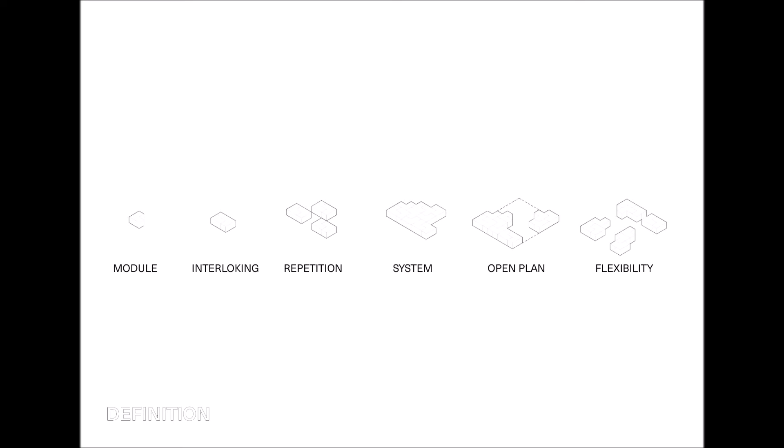Modular architecture can be understood as the design of any system composed of basic units called modules, interlocking between each other and repeating in an open plan, allowing flexibility for the design. The opposite would be integrated architecture, in which no clear division exists between components.

Modular Vernacular: the concept of repeating a module in an organized way can be found in vernacular and traditional architecture. One example are the shabonos in the Amazonian or the Japanese houses, where a series of modules are repeated in order to create either settlements or housing units.

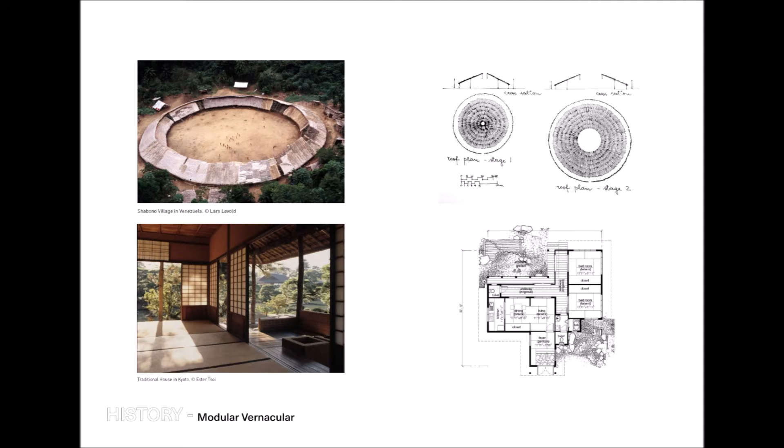Ancient civilizations also had their own approach to modular architecture, which can be found from Egyptian and Mesopotamian temples all the way to Greek or Roman temples. Modular logic can also be found in mosques and cathedrals, in all kinds of temples and housing throughout history in classical and modern times.

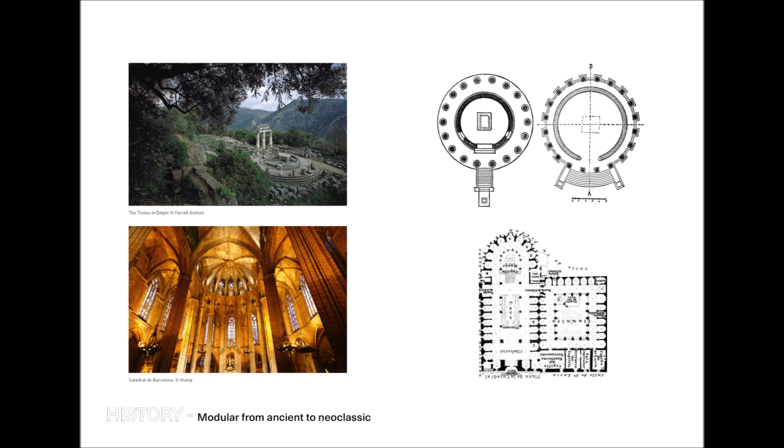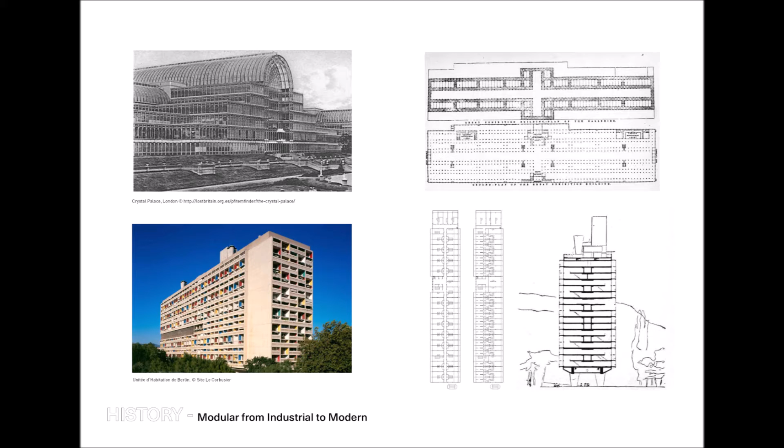With the Industrial Revolution and the popularization of steel structures, modular components were easily produced, transported, and mounted. Modern movements, such as the Metabolists in Japan and the Bauhaus in Europe, found solutions with prefabricated concrete modules, which maximized the production of housing as if it were an assembly line.

Parallel to this, came some movements of anti-industrialization. With the Arts and Crafts movement, there was an intention for architecture to head towards craftsmanship and art, freeing it from classical patterns and from the mass production of the industrial era. Later in the 20th century, the Deconstructivist movement searched for a break from the modularity and stiffness of previous architecture movements.

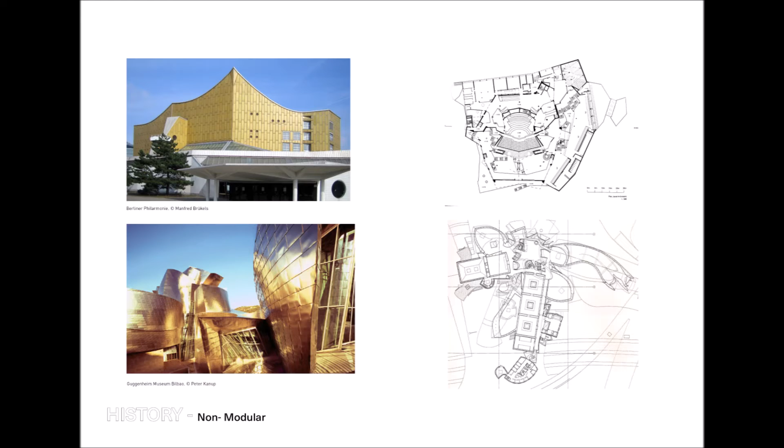Nowadays, modular architecture positions itself as one of the most sustainable solutions in building matters, as it involves a great deal of prior planning and preparation. Before construction, there is a significant cut on expenses and waste on the construction site. Nevertheless, the modernist tendency of reinforced concrete and some new slow-degrading materials is still dominant over other low-impact materials.

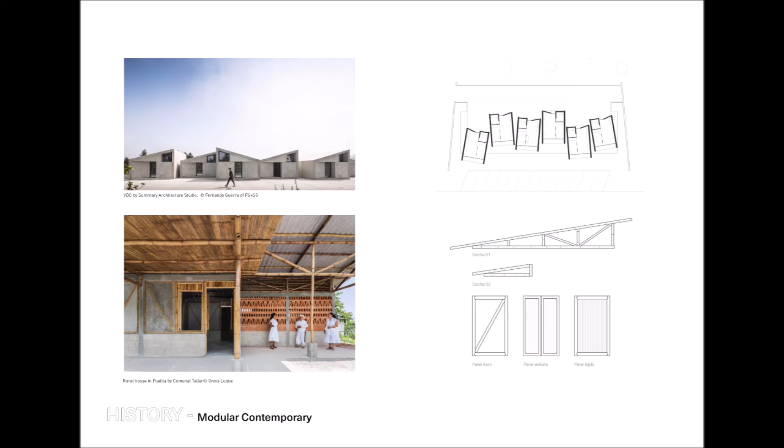What we consider as a module, according to Britannica: modular architecture is an arbitrary unit adopted to regulate the dimensions, proportions, or constructions of the parts of the building. This concept begins in antiquity by using the column as the main module of the construction design process.

The module in Vitruvius's theory appears as a crucial tool and method to achieve understanding of a proportional concept. In Japanese architecture, the rice carpet, called tatami, was the main module used to give proportions that determined room sizes.

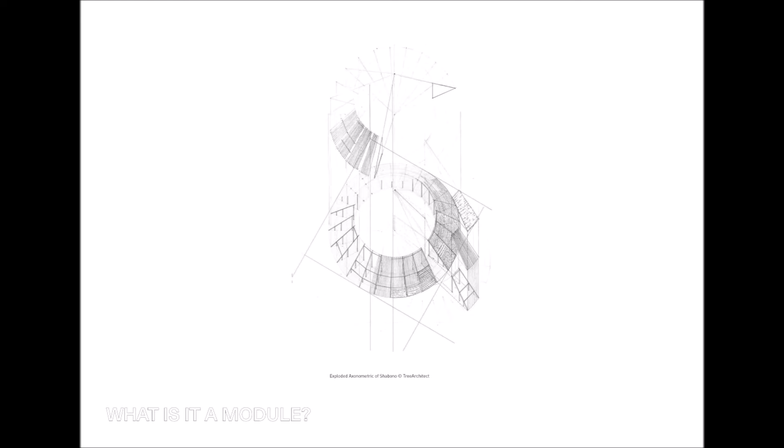Another example from vernacular architecture is the Shabono communal dwelling of the Yanomami tribes in Venezuela and Brazil. This circular construction is based on a module unit by which it is possible to create a general diameter of around 80 meters.

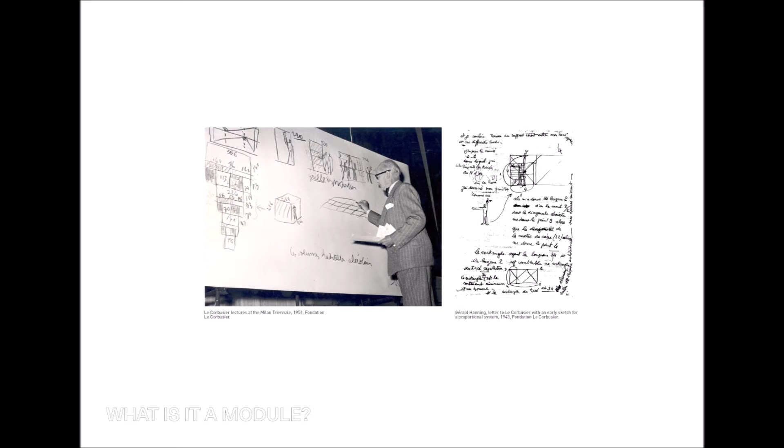In the modern movement, modules were used throughout the design process to organize the proportioning and dimensioning of the plans. Probably the most comprehensive system imagined in the 20th century was the Modulor of Le Corbusier. This proportional system was a product of an interdisciplinary collaboration with historians and mathematicians, referring to statistical measurements of the human body.

Module nowadays is mostly connected with prefabrication systems that serve to assemble the building on the construction site. Concrete, either precast or prestressed, is frequently used to produce modules that can be assembled in a variety of designs. Although modular design is deeply connected with architecture throughout history, the prefabrication modular system is an outcome of the industrial era.

Louis Kahn, with his architectural interest directed toward aesthetics and strong sensorial experiences in the built environment, approached modular and prefabrication design in a way to achieve a creative solution. He transferred the prefabrication model from the construction industry to a more tectonic and architectural context. A phrase used constantly by him that sums up his view was, 'What does a brick want to be?'

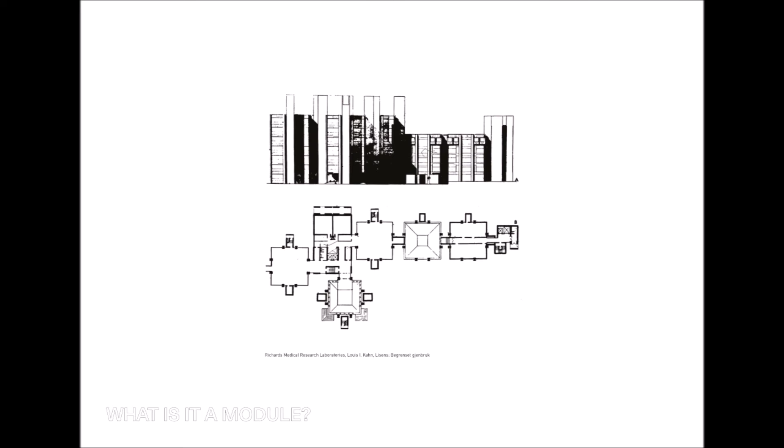Module, as we realize, is a vague term. As indicated by its architectural history, it can be expanded to a spatial generator or reveal a platform that various disciplines can interact with. It can achieve a flexible outcome, liberated from standardized approaches.

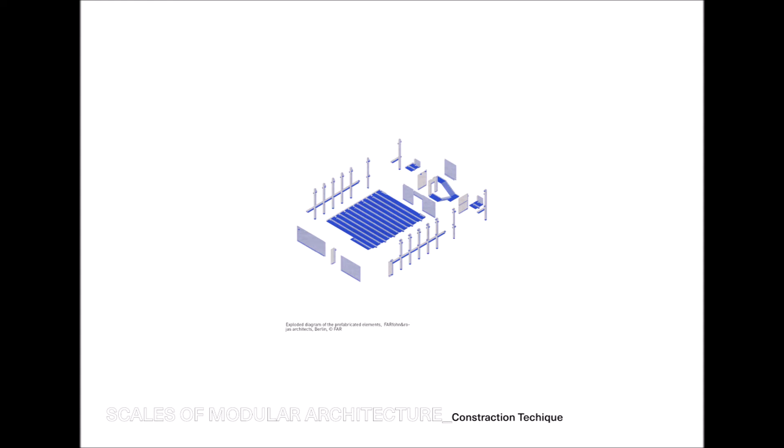Thinking in a context of limited resources, the module can incorporate vernacular architecture and social parameters in a constructive way. Taking this into consideration, we have noticed three different categories, three different scales of modular architecture. To begin with, an interesting dimension of modular architecture is the ability to form an independent construction system with various different alternations. Mostly industrial examples deal with this aspect, but important vernacular translations appear often as well.

The project Wohnregal by FAR Architects is an example of how precast concrete elements, common in industrial warehouse-style buildings, can bridge important challenges with high architectural value.

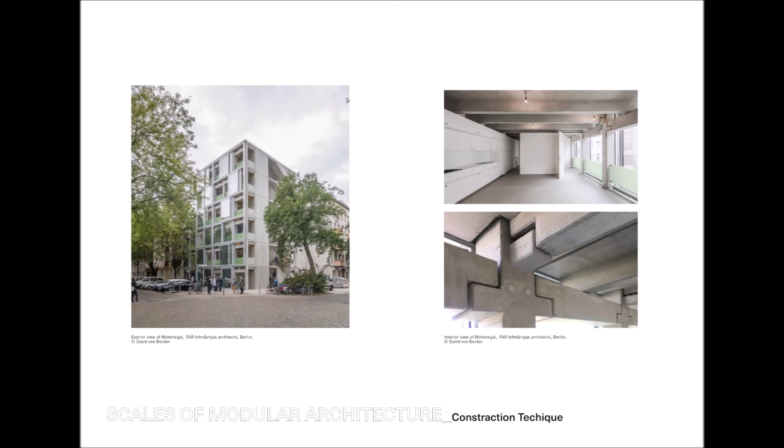They use the prefabricated system with long-spanning TT beams that can support a precast ceiling without the need of interior structural elements, achieving a flexible interior configuration and low construction cost.

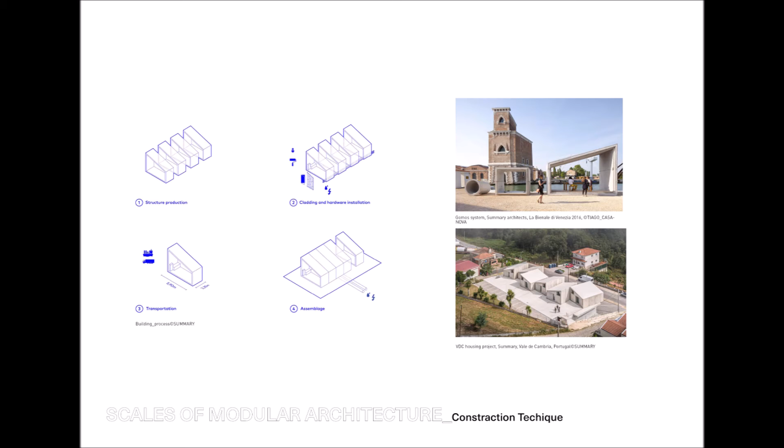A second example is the housing project VDC by SUMMARY, located in Portugal. This project uses a construction system named GOMOS, which derived its principle from the logic of the prefabricated modules used to assemble conventional sewer pipes. Following this logic, the GOMOS prefabricated system consists of precast section modules joined on the construction site to create a continuous shell.

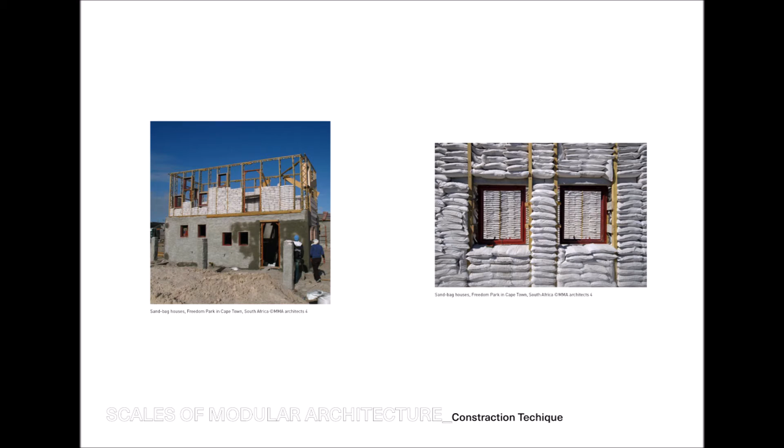The last example in this scale is the Sandbag House by MMA, located in South Africa. This project uses the EcoBeam sandbag structural system, by which sandbags fill a wooden frame. It is proposed as an affordable, green and adaptable modular solution, while a collective procedure emerges as it is a friendly construction system for inexperienced people as well.

The second scale is modular building systems, where modular architecture consists of expanded spatial components. The modules form small units which, by multiplication, packing and links, shape the final building. It is worth mentioning that the common ground shared by this kind of project is the intention to include urban and communitarian principles in their design.

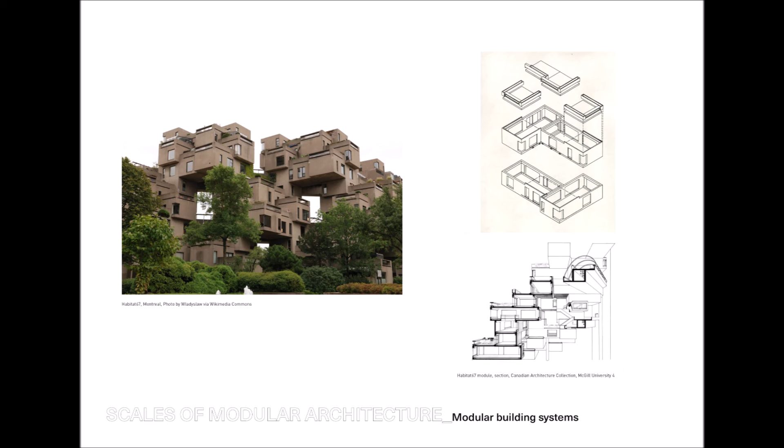Habitat 67 in Montreal by Moshe Safdie, for example, is shaped by a composition through stacking of a basic spatial concrete module that forms the main living unit. He tried to achieve two contradictory goals: first, a low construction cost through prefabricated elements, and second, a new typological housing approach where suburban qualities can be transferred into high-dense urban regions.

Another project is the Gando Teacher Housing by Kéré Architects in Burkina Faso. The vernacular housing typology of this region affects this project, as the houses are formed by a sequence of dwelling modules that can be combined flexibly, creating diverse sizes depending on the inhabitants' needs. The site configuration follows the traditional Burkinabé compound, using an arc layout to arrange the six units.

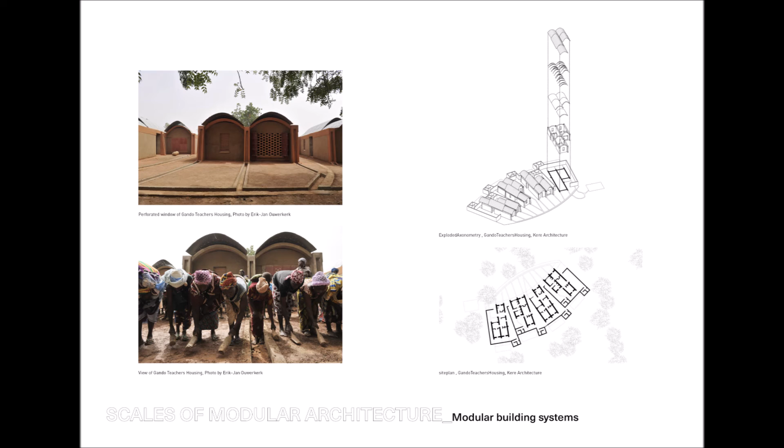Finally, the last scale of modular architecture refers to landscape design, where modules create new topography, or via bottom-up approaches, shape urban furniture and artificial landscape, aiming to form a collective public space. These projects use modularity as a means to create a topography where social interactions and sensorial experiences are the main objective.

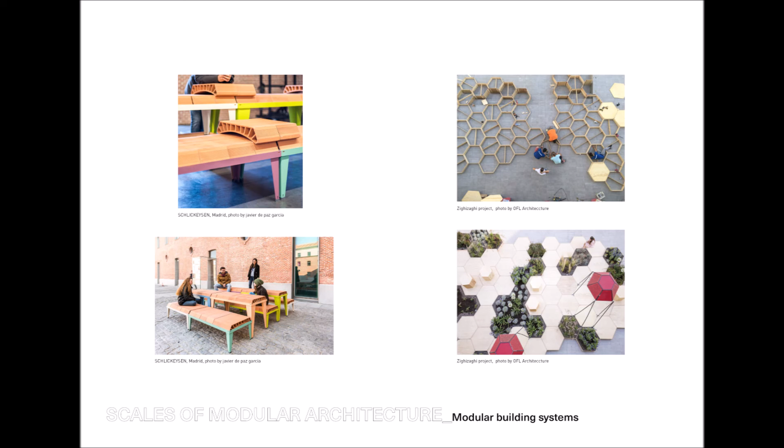Modular vernacular architecture in Cuba can be traced back to the traditional Taíno villages, who built their dwellings using only available local resources. The repetition of natural material modules allowed their building structure type, called bohío, to be scaled as both a regular Taíno dwelling and larger buildings called caney, which housed royals or ceremonial temples, and which were also repeated as modules to form a village.

In the beginning of the Cuban Revolution, mass production of housing was a social necessity. Therefore, the INAV assumed modular architecture solutions in an attempt to reduce construction time. Housing units and vertical circulation nuclei were used as modules that are rotated, repeated and overlapped in different manners, composing multiple variants that help minimize the monotony that can affect massive construction projects.

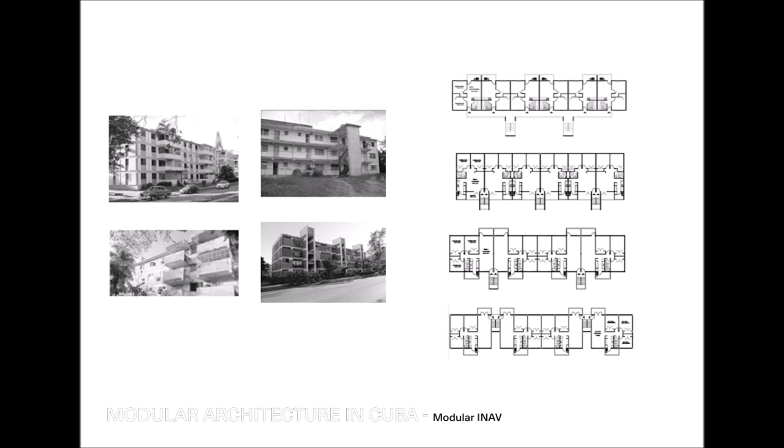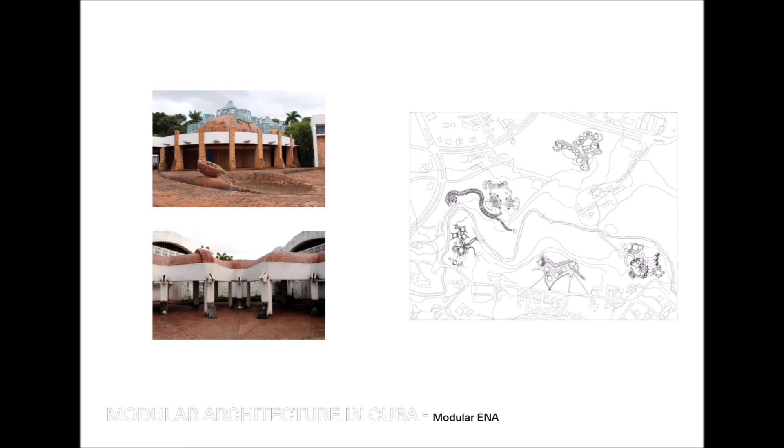Escuelas Nacionales de Arte are among the foremost examples of this period for their high architectural and design quality. The use of material modules such as brick and terracotta tile in Catalan vault construction to form the workshop modules that are repeated across each school, connected by a series of galleries reminiscent of a traditional tropical city, acting as a set of guiding design principles.

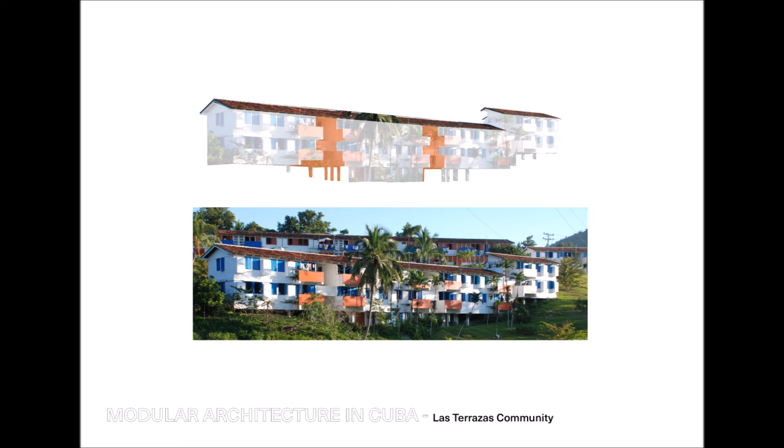Cuba's mild subtropical climate and wide spectrum of natural building materials offer broad possibilities for non-prefabricated modular low-tech designs that assimilate vernacular codes, creating quick and affordable housing solutions that do not require high degrees of skill, tools or machinery. However, these solutions require a higher degree of attention and maintenance to ensure durability.

Modular prefabricated construction, however, allows for drastically reduced construction time along with cost. This solution can allow dwellings or businesses such as hotels to be constructed in a short period of time. Unfortunately, the availability of higher-tech building materials continues to be challenged by the embargo, so the application of industrialized modular architecture would be reduced to large-scale projects.